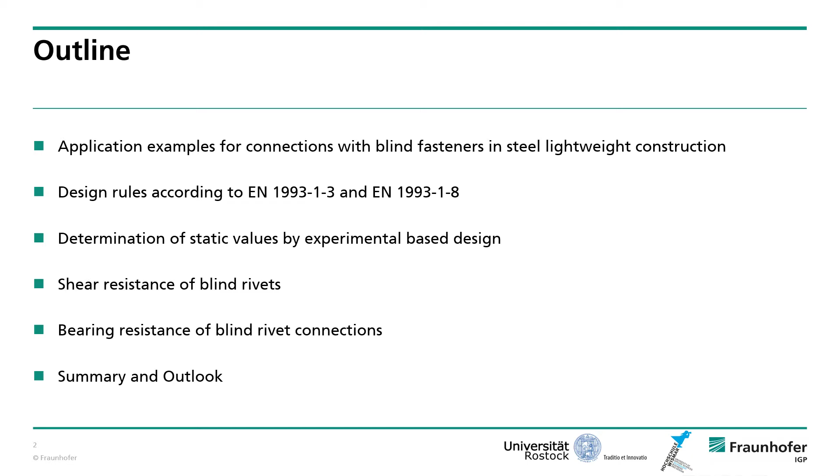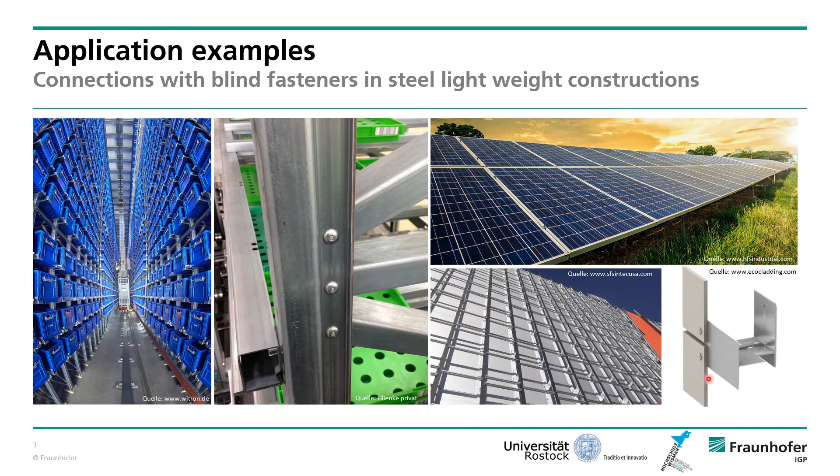Here you can see some application examples of steel lightweight constructions where blind fasteners were used to join the components inside these constructions. On the left hand we can see high-rack warehouses with slim profiles and small connection sizes. With the new field of the renewable energies in such solar power plants, the substructure is joined by blind fasteners, or roof and wall claddings, where the roof or wall cladding is connected to the substructure by using blind fasteners.

For the shown lightweight steel constructions and their bearing type connections, static strength verification is necessary, which can be done with the design rules according to the Eurocode 3. For lightweight steel constructions, we have the part 1-3, and for steel constructions, we have the part 1-8.

And if we now look on the design equations, we see that for bolted connections, a pure analytical strength verification is possible. In contrast, for the connections with blind rivets, only the bearing resistance of the components inside the connections can be determined pure analytically.

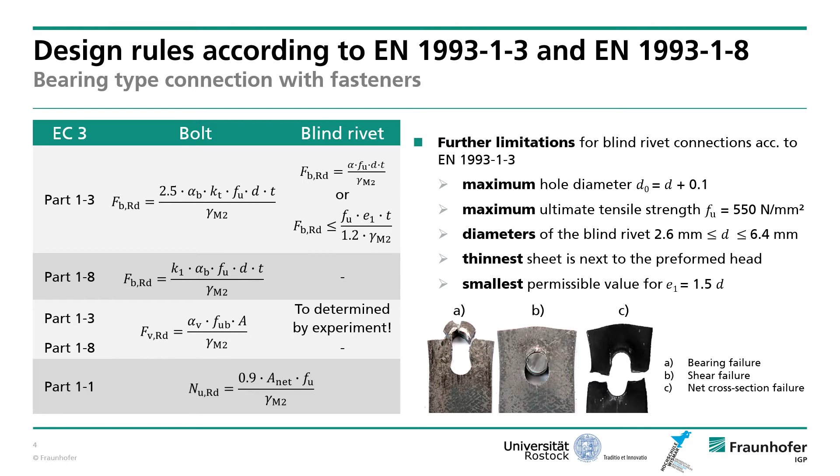The shear resistance has to be determined in experiments, and in addition, this equation to determine the bearing resistance is limited by further requirements, which we can see on the right side. And because of these further limitations, the shown application examples are often not covered by the standard.

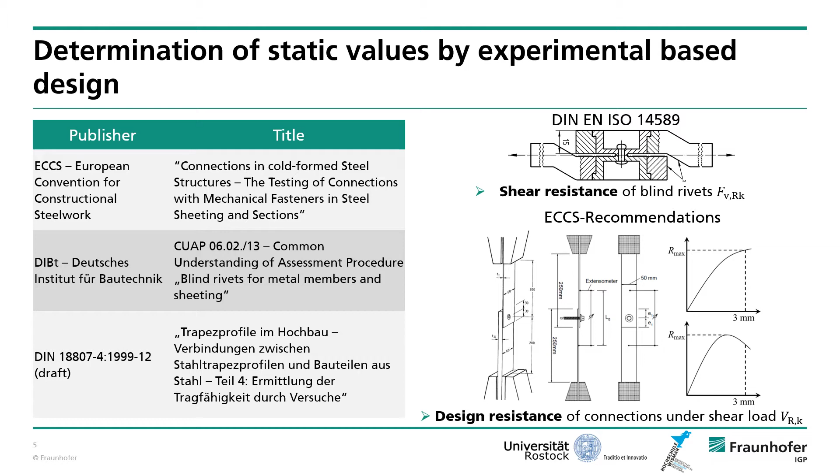Whenever the determination of static values by experimental based design for connections with blind fasteners is necessary, we have the DIN standard 14589 to determine the shear resistance of the fasteners, and also we have the ECCS recommendation where a test procedure is described to determine the design resistance of connections under shear load. There are further other specifications, but they are based on the ECCS recommendations, so I do not want to go into them in depth.

In the absence of a design rule for determining the shear resistance of blind fasteners, tests were carried out with the aim of determining an adapted quantity equation. This equation should enable a pure analytical verification in the future. For the test, we used our test machine Zwick Z400E and the test arrangement according to the DIN standard 14589. And during this test, different parameters were varied. For example, the type of the blind fastener, the hole diameter, and the position of the shear plane.

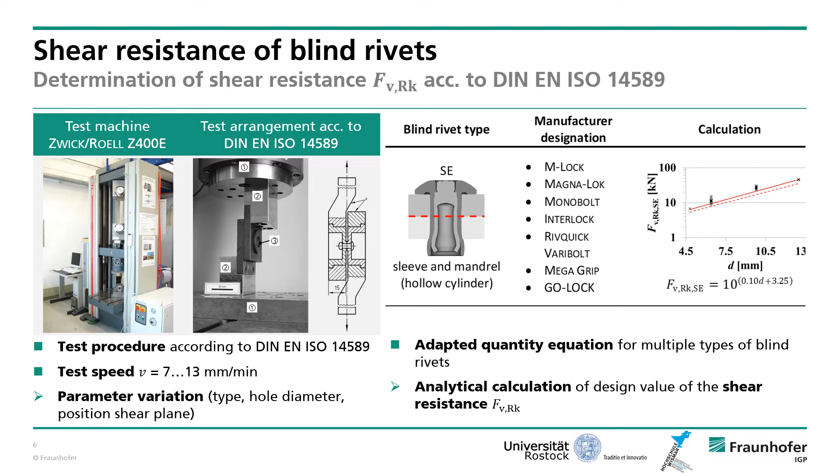As a result of these investigations, we could develop an adapted quantity equation for multiple types of blind fasteners, as shown here on the right side. This equation allows a pure analytical calculation of the shear resistance as a function of the diameter.

As already mentioned, the procedure for determining the design values for lightweight steel connections is described in the ECCS recommendations. The tests were carried out on our test machine Zwick Z400E with the test arrangement according to the ECCS recommendation and the described test procedure, where a test speed of 1 millimeter per minute is defined, and also a free measuring length of 150 millimeter to determine the displacement during the test.

The connection was a one-sided connection with a plate thickness combination of 1+1. And for the evaluation of the test results, we used the procedure according to the ECCS and compared these results with those according to the standards. So you can find in the diagram the lines for the bearing resistance of the components according to the Eurocode 3 part 1-3 and also for the part 1-8.

And in addition, you can find detailed photos which show the connection at different times of the test, and we can see with the increasing displacement measured in the connection, the inclination of the blind rivets also increased, and because of this it cannot be assumed that there was a pure bearing failure of the component, and this is clarified by the comparison of the design values. The evaluation according to the ECCS provides the lowest design value, and this means no separate verification according to the standard, the Eurocode 3, is possible.

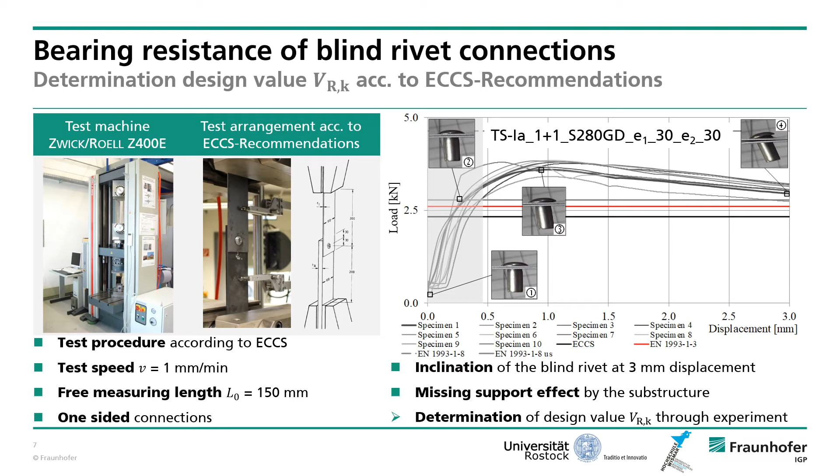We performed additional tests with one-sided connections, but this time the sheet thickness of component 2 was minimal 2.5 times that of component 1. This change was made on the assumption that this would suppress the inclination of the fastener, which we have seen in the test before. We also systematically changed the edge distances and load direction until the failure of the connection changed from bearing failure to shear failure of the blind rivet.

And with the maximum load from the test where we had bearing failure of component 1, we determined the bearing coefficient, and this value was then related to the design quantile of the Eurocode 3 part 1-3 and 1-8 for bolted connections, and the location of the test point shows that a safe design is possible according to these design rules, also for connections where we use blind rivets or blind fasteners.

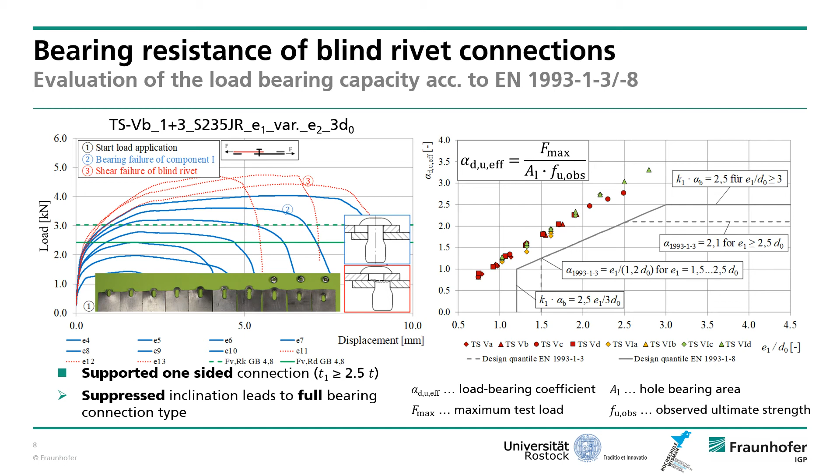Let me summarize again the points we have looked at in this presentation. We presented new design rules for connections with blind rivets. First, we had the adapted equation for multiple types of blind rivets, where we can determine the shear resistance as a function of the diameter fully analytically. The second point was the bearing resistance of the components inside the connections, where we showed that the formulation from the Eurocode 3 part 1-8 for bolted connections is also applicable for connections with blind rivets if we have specific connection geometries. And with these new design rules, we can now do a separate verification of the blind rivet and the components.

In the outlook, it should be mentioned that the new design rules are limited to an ultimate strength of the components of 550 Newton per square millimeter. So the field of high-strength steel applications isn't included in these new design rules and needs more research in the future. And also the fatigue resistance with a specific detail category for the blind fasteners and the connections is an open point that the authors want to address.